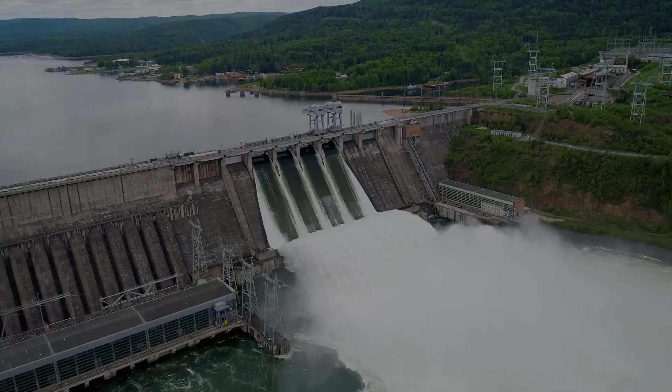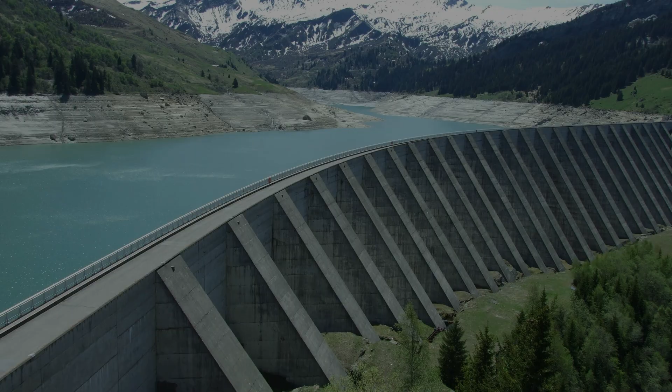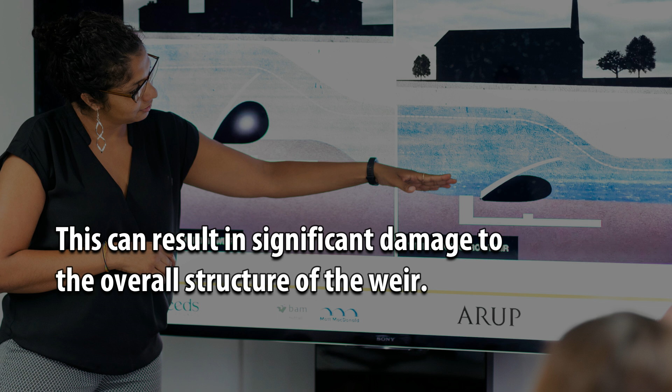In the downstream part of the weir, especially in the stilling basin, there is a hydraulic jump phenomenon caused by the change in flow from supercritical flow to subcritical flow. The hydraulic jump in the stilling basin of the weir causes bottom scouring, especially in the unprotected downstream part of the weir. This can result in significant damage to the overall structure of the weir, so this downstream part requires protection to overcome scouring.

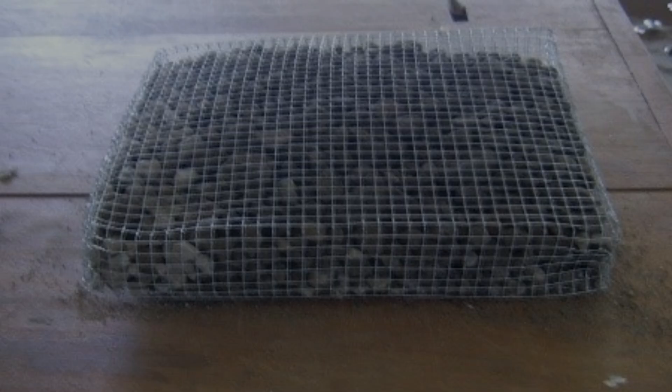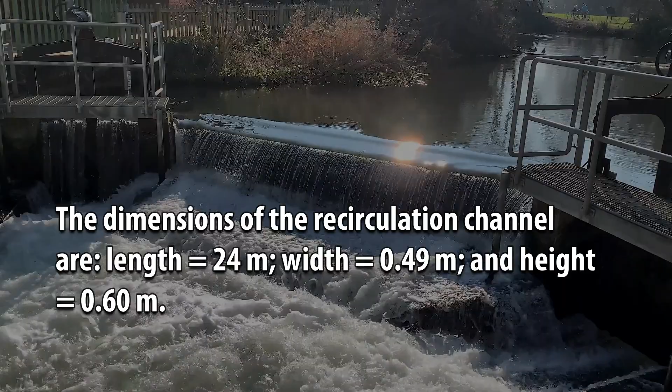Therefore, to overcome this problem, a laboratory study is needed on scouring and its mitigation in the downstream part of the weir. This research was conducted at the Hydraulics Laboratory of the Surakarta River Research Center using a recirculation channel. The dimensions of the recirculation channel are: length equal to 24 meters, width equal to 0.49 meter, and height equal to 0.60 meter.

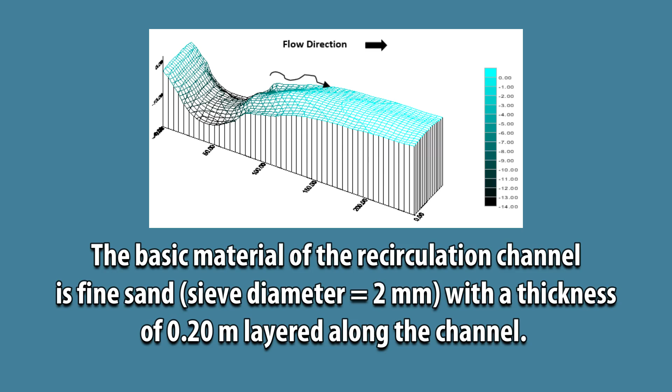The basic material of the recirculation channel is fine sand. Sieve diameter is equal to 2 millimeters, with a thickness of 0.20 meter layered along the channel. The channel slope is 0.004, and it is assumed that there is no sediment load in the upstream part of the weir.

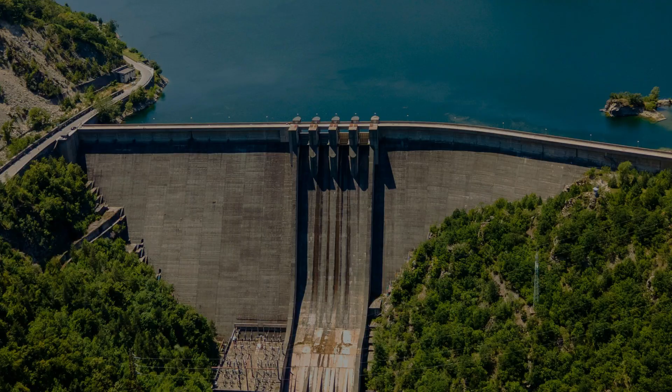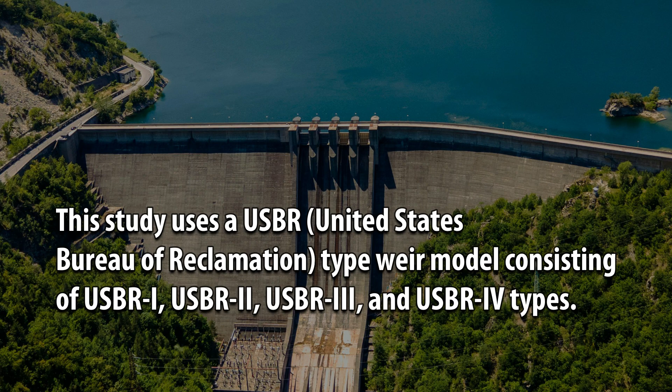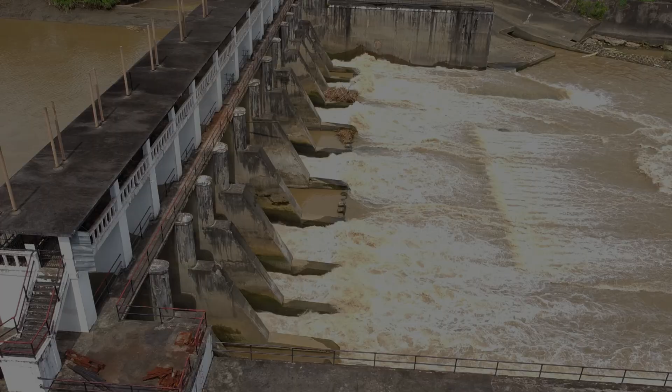This study uses a USBR, United States Bureau of Reclamation, type weir model consisting of USBR-1, USBR-2, USBR-3, and USBR-4 types. The model is placed approximately 9.0 meters from the upstream so as not to be affected by wave ripples from the inlet. The experiment was conducted using 4 variations of running discharge and 3 variations of running protection.

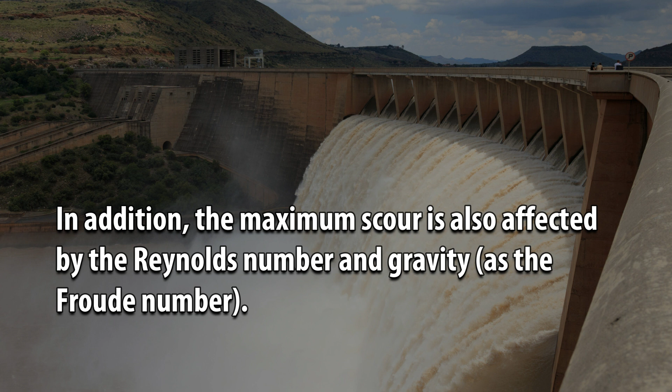The results showed that the maximum scour depends on the flow velocity, shear velocity, and flow height downstream of the stilling basin. In addition, the maximum scour is also affected by the Reynolds number and gravity, as the Froude number. These parameters are significantly interdependent.

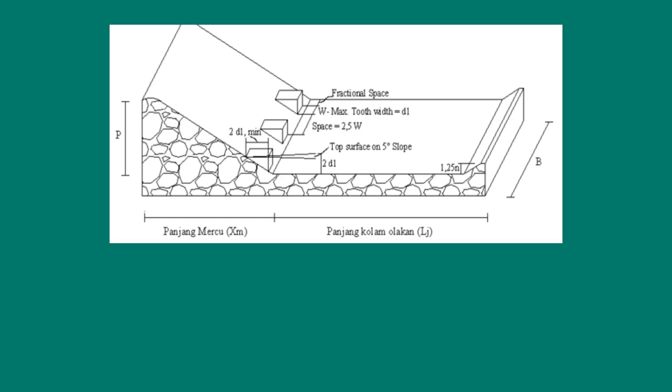Furthermore, there is a significant reduction in scour downstream of the stilling basin protected by riprap, RR 1/4 LMAX, RR 1/2 LMAX, and RR LMAX. In addition, protection using riprap of length LMAX or loose gravel can protect against scour with the smallest scour depth. However, scour still occurs downstream of the stilling basin even though there is protection along LMAX.

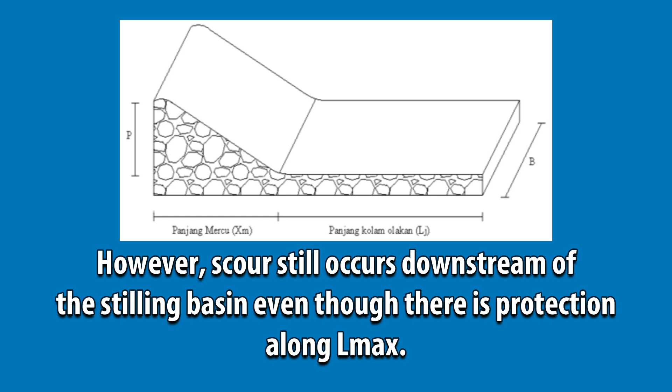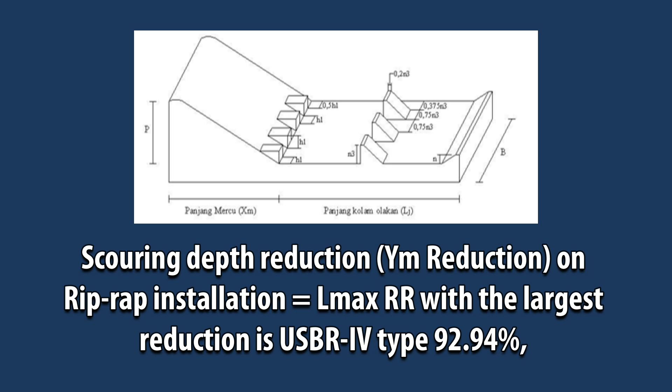Scour depth reduction, YM reduction, for riprap installation equal to LMAX-RR, with the largest reduction in USBR-4 type at 92.94% and the smallest in USBR-2 type at 81.21%. While the largest reduction in scour length, LM reduction, is USBR-4 type at 75.55%, and the smallest is USBR-1 type

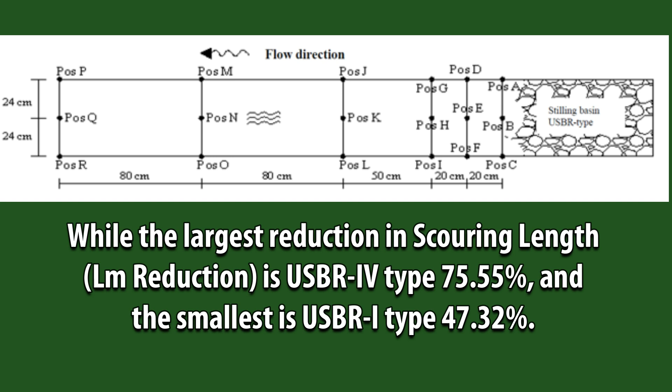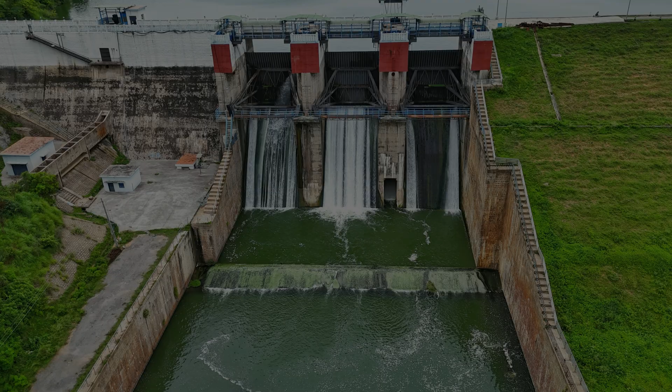at 47.32%. So overall, the maximum scour depth reduction, YM reduction, occurs in USBR-4 type and the smallest in USBR-2 type. While the maximum scour length reduction, LM reduction, occurs in USBR-4 type and the smallest in USBR-1 type.